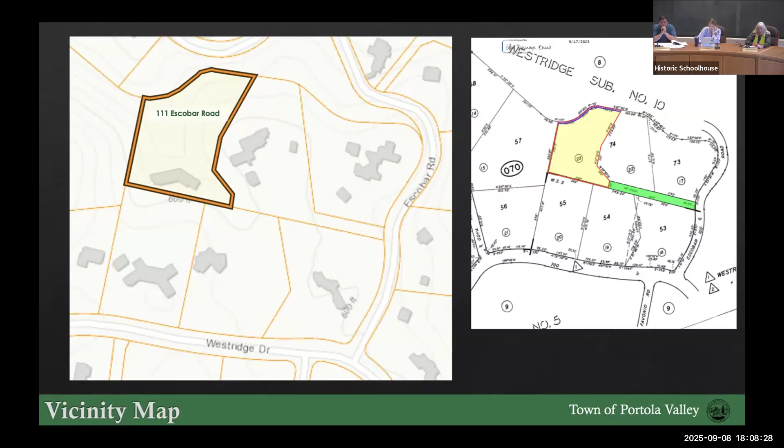The existing site includes a long access way via an easement at 111 Escobar that leads to a main residence with an attached carport. There are existing rear wood decks, a portion of which have been removed for safety reasons.

The existing residence main level is 3,273 square feet, of which 461 square feet are a junior accessory dwelling unit. There is an attached 581 square foot carport to the left of the main residence, and the residence also contains a lower level that is approximately 1,378 square feet.

There is a fenced vineyard, two fenced vineyard areas: one at the rear of the residence, and one at the left of the residence, which is the westerly portion of the site.

Existing fencing includes 6-foot wood wire fencing along the north perimeter, which has since been removed, and along the east and southern perimeters of the site. There's also 6-foot wood wire fencing around both of the vineyard areas.

The fencing at the westerly portion of the site, one of the vineyard areas, is proposed to be removed. It may have already been removed from over there, but that is proposed, will be proposed for removal.

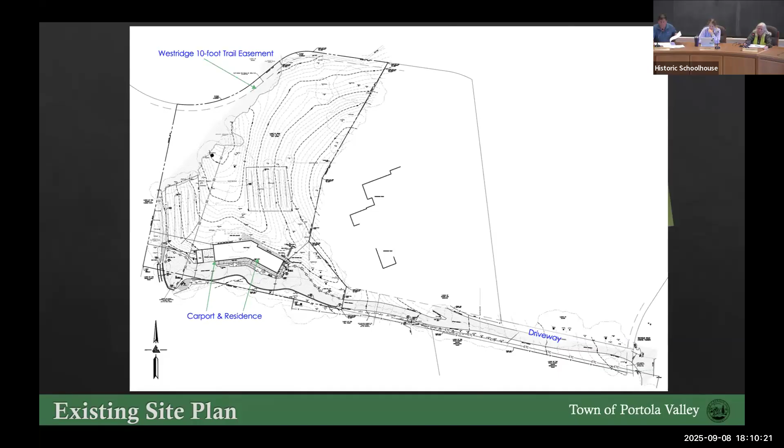The applicant proposes a 1,100 square foot addition with an interior remodel to the main residence and an exterior remodel, new decks, a new roof, a new stepped concrete driveway with portions that will be permeable geogrid pavers, fencing (one portion of which I'll discuss soon in a slide that follows), significant tree removals, and drainage.

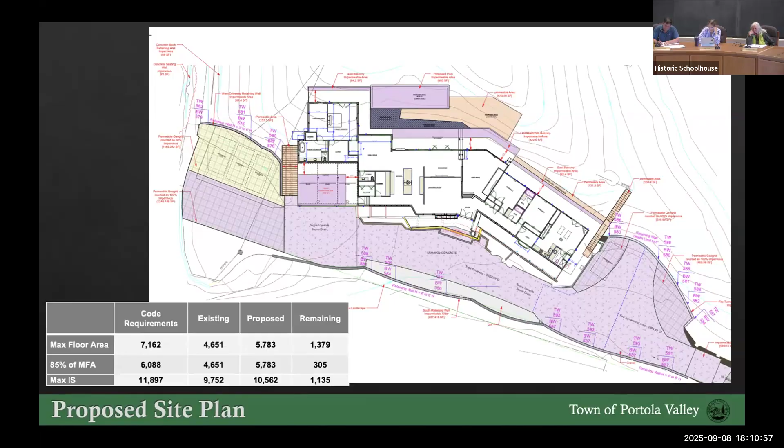The proposed site plan I have here shows the upper level and the lower level. This continues, as mentioned, the 1,132 square foot addition to the main level of the residence.

The proposed floor plan includes, in this peach color, a new primary bedroom and bathroom and an office, and then there's a 133 square foot approximate addition to the family room area.

There's also a 157 square foot front entry addition. On the lower level of the site, there's no work proposed for the interior of the residence. The work that is proposed includes the decking area and a pool.

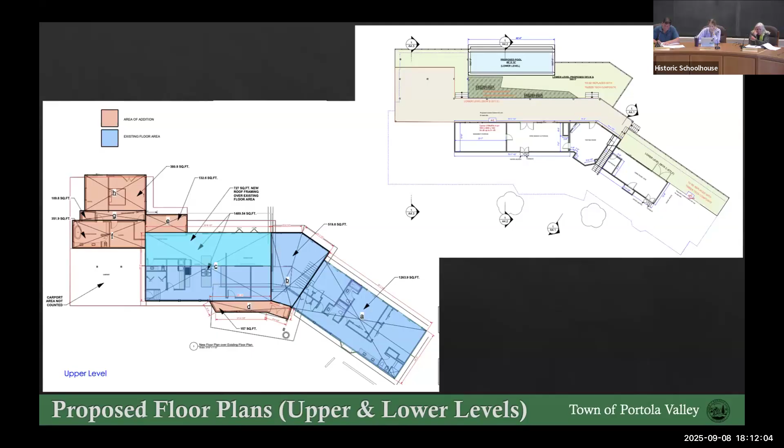The applicant is proposing a new stamped concrete driveway with an expansion area at the end of the entry drive access easement to allow for fire truck turnaround.

An existing retaining wall and seating area are located at the westerly area of the site. Construction of these two items is currently unpermitted, and structural review will occur as part of the building permit phase. At the site visit today, the on-site conditions were observed, and the ASCC may consider adding a condition of approval regarding the overall design at the building permit phase for this item.

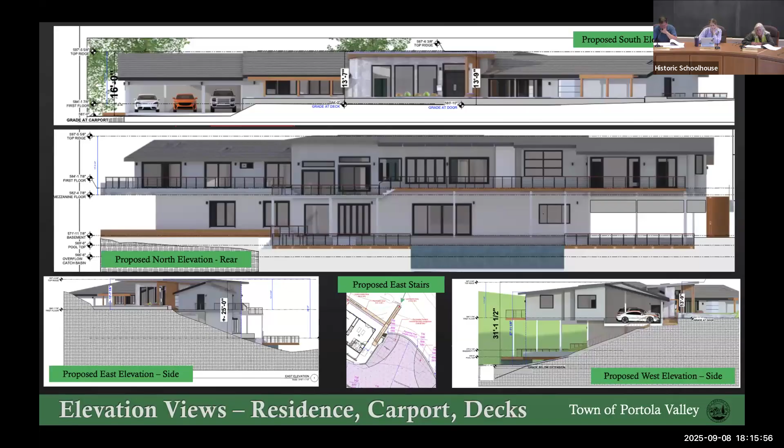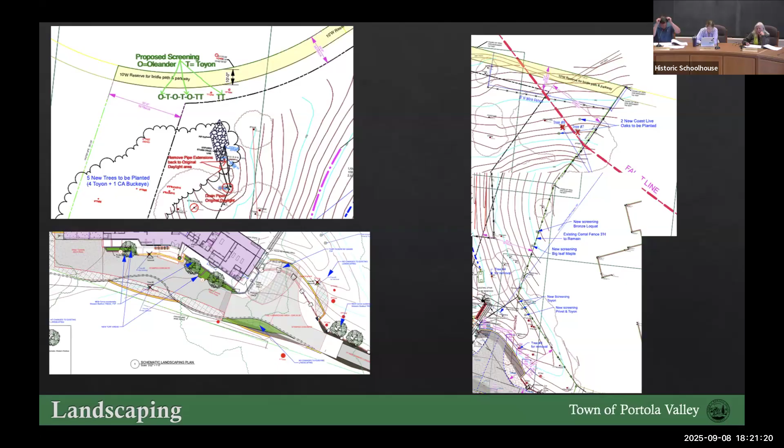Four significant trees and 1 non-significant tree are proposed for removal on the site. 2 additional significant trees located at the northeastern area of the site have been removed without a permit, mistakenly, by landscapers, and this has been added to the scope of work for the proposal.

The Conservation Committee visited the site and does not object to the proposed removals and plan of action as described in the landscaping plan presented in the previous slide. The Conservation Committee also recommends removal of a Monterey pine next to a stone pine tree and 2 cypress trees, and several privets between the cypress and Monterey pine. The area where these are located is on the left side of the driveway that I'm describing.

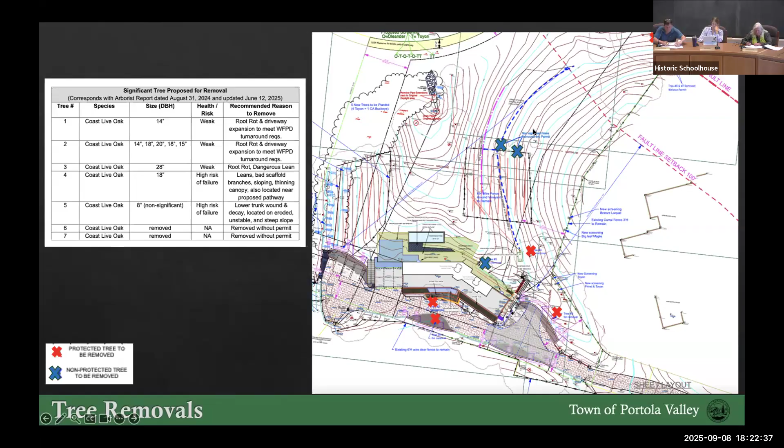Staff also requests that the ASCC provide specific box sizes for the replacement trees to be provided as a condition, where they had been removed mistakenly. Almost done.

There are 2 stairways: one leading down from the carport, and another leading down from the right side of the house. The proposal does utilize minimal lighting, minimal lumens, for safe movement throughout the site and for the structures. The ASCC may wish to provide input as well.

The applicant provided notice to several neighboring parcels on August 27, 2024, and the town provided noticing to neighbors within a 300-foot radius. As of August 29, 2025, no public comments were received to date. I forgot to mention at the beginning, the applicant did present the proposal to the Westridge Association and did receive a conditional approval based on the initial submittal that was provided.

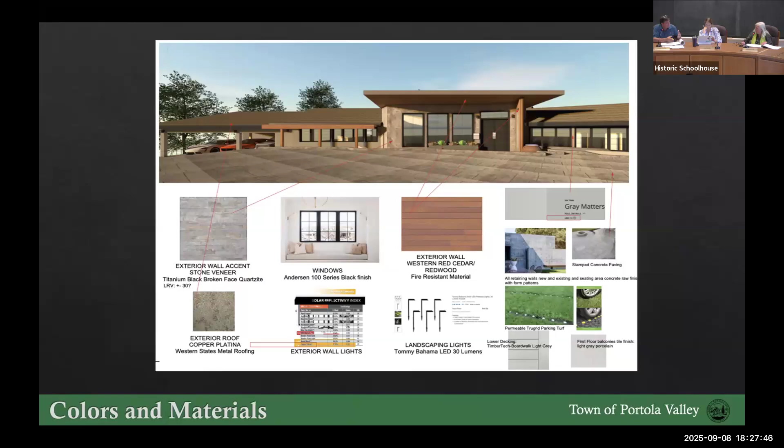Because we didn't look at the pool area at all, or below the house, I just saw that only 12 cubic yards were going to be excavated for a 40 by 12-foot pool. Maybe it's going to be built basically in a raised concrete retaining wall. I also do site work and landscaping, so it could be a combination based on what was provided.

Maybe there needs to be clarification, but I think combining this and this definitely makes sense. Stating that they didn't account for as much, it was more of a set, which made it different.

The cross section at A42 is the one I saw, and I went and referenced it, and I think I see now how they're building it with concrete retaining walls. It seemed nitpicky, I don't know if it helps, but one thing I could share with you.

Because of the slope, a lot of the pool is actually being built up, so there's not much excavation involved. The deep end, which would be 6 feet, is just sitting on the natural grade level, and the shallow end is on the higher end where the grade is about 3 or 4 feet. So there's not much excavation, which is what was explained to me.

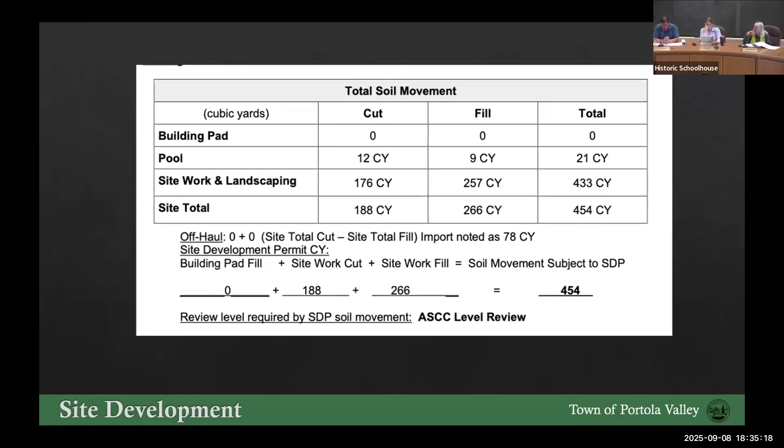I would like to know about the skylights. Will they have inside covers? I don't know what you mean by this. Will they be protected on the inside from light? I hadn't thought of it. You mean like shutters? The skylights on the roof, Jamie. Sorry, I said sky lamps, and I was thinking of the wall. I missed it. I think Dana's question goes to the radiating light, ambient light onto the trees.

Yes, on the roof plan here, if you're asking, I did ask the homeowner, and several of these lights are in areas that are not heavily used. There are areas that I can ask for clarification on, for whatever areas may use more light. All right, thank you.

No other questions? Do you have any statement that you want to make about your project? Yes, I do. Actually, I was wondering if you wanted to talk.

Particularly to our kind neighbors, Ed and Jackie, who came here and were also here this afternoon, what we want to do is disturb as little as possible of what they're viewing. So we talked a little bit about the retaining wall, and it's our intent to finish that retaining wall, which Lance pointed out is not very attractive because we had to stop work on it. But we're going to finish that over with a stucco that matches the retaining walls being built on the property for a fire turnaround and these other areas. So we're going to make everything match. And Lance pointed out that if we put stucco on the retaining walls in the west area, they will get mossy and grow over with greenery, and I think we agreed that's not a bad thing. So is that something that is okay?

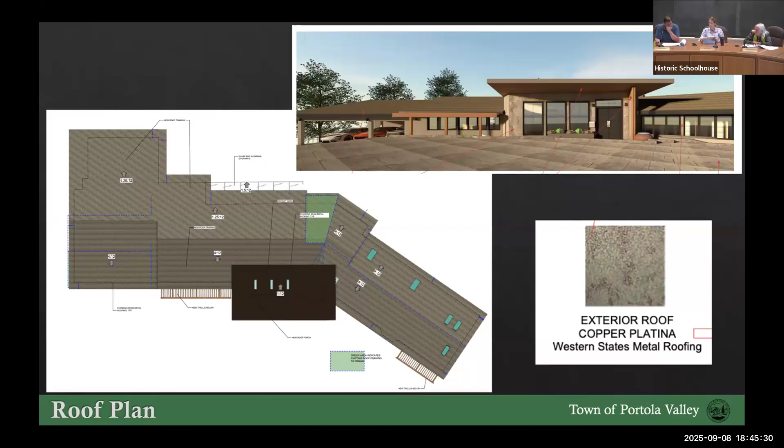Okay, and so that was the hope. But since we have actually removed the fence on the northwest side, and the fence on the northeast side, we're not sure if it helps or not, but it does conform. Because it's set back, it's like a fence orphan. It is a fence orphan.

We have to go through Westridge to come up with a proposal for fencing that will not be within the 20% of that area, but within our domestic fencing as allowed for fencing. We have to come up with a plan. It's not in violation of the city if it's not within 20.

But we need to work with Westridge to see how we can come up with a fencing plan that will not have to be... Okay, but isn't that seems to be far from your vineyard? It is. The idea was we wanted to keep the deer from coming in and eating the stuff on the property, but I don't know how that's going to sort out. I have to come up with a plan for that, so that they can do it.

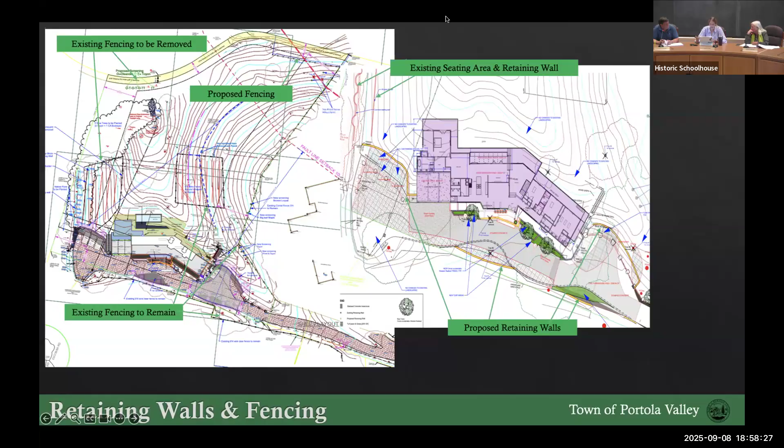It's also strange to me in the lighting plan that there doesn't appear to be any lighting there. We talked about the use, but it seems to not have enough information. If it's going to be where chairs and something, I don't quite understand why there's no lighting called out. It's kind of ripe for enclosure in the future in terms of how it's set up. I'm curious to get your guys' thoughts on that too.

If we're looking at it from the perspective of how well it was placed or massed out for the site, it's a little strange. I agree with Gina, and it's one of my notes - was that space specifically identified?

I know we talked about the area - there's not a north arrow on this page. East, where the new unpermitted retaining... North, west? Project West. There's not a north arrow on this sheet. Here's north, there's a house here, and there's the retaining wall here. Okay, so that's west.

I think we should have a condition of approval that a subcommittee takes a look at that once it's designed, because right now it's sort of loosely included, but there's no indication of whether there's going to be paving or what the finishes are. We don't have to talk about it too much, but as part of that, I know we talked about screening.

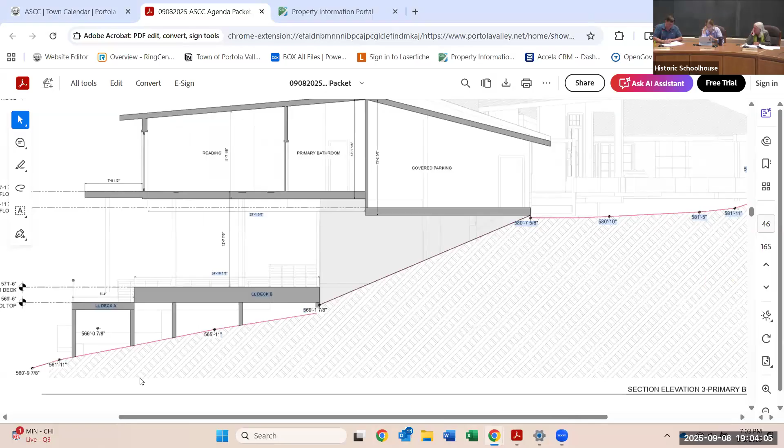Okay, I think I'm catching up, let me just go - I had started to kind of record. Well, we can jump back in too. Yeah, you guys can go ahead.

I like the project. I think I like the colors and materials. I like the design, I like the roof. I mean, so I think there are a lot of things for me that work.

Tree removals. Just because you guys didn't mention it, I think all the pines, the Italian stone pine, the Monterey pine, and the Italian cypress, I think conservation got the rest of it. And the privets, all privets need to be removed.

And I don't want to see you use the oleander. I think as the oleander die, I think they go. Like the town, it's part of the ethos of the town that we don't have oleander. And it's always rather shocking when you come around the corner and somebody's just surrounded their house with oleander. So I don't support that, the use of it.

The open space under the master bedroom, is that open? I would consider putting a contingency from the commission on that so it can never be enclosed. And so I would like to put something legal there so that can never be developed and enclosed without coming through the ASCC.

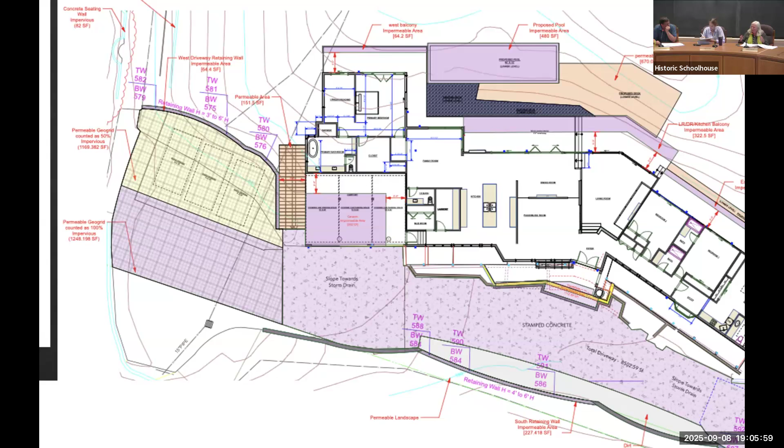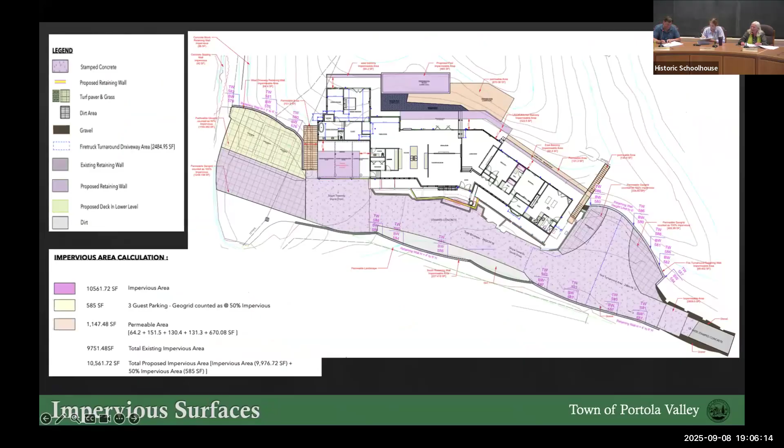Okay, and lighting. I don't know how we're even seeing plans that have lights at windows. We don't light at windows. The lighting ordinance is one door. I mean, it's not with the inspectors. You light one light at a door, no lights at windows. So, I mean, it's a dark town, and it's intentionally a dark town so that you can see the stars.

That's in our general plan. It's a pretty beautiful thing. So I would say remove anything that's at a window. You can have a light at a door. All those lights on the stairs going down, it's way too many lights. Maybe one every 4 or 5 steps, or develop something else, but not a string of lights - it looks like an airport.

Okay. All right, I don't want to overwhelm you here.

And the retaining wall for the fire truck. I understand the retaining walls and I don't know that Yerba Buena's going to cut it for covering them. The small one, okay. On the west side. Yeah, I know. Okay, both of those.

I mean, those are kind of where I was headed. And yes, I'm worried about the drainage, but I don't know how we're going to treat that. Well, I don't think it's fully finished yet. I don't think necessarily we need to. So we'll have to think about that in our motion, how we handle it. The civil guys will have to resolve that if it's not working.

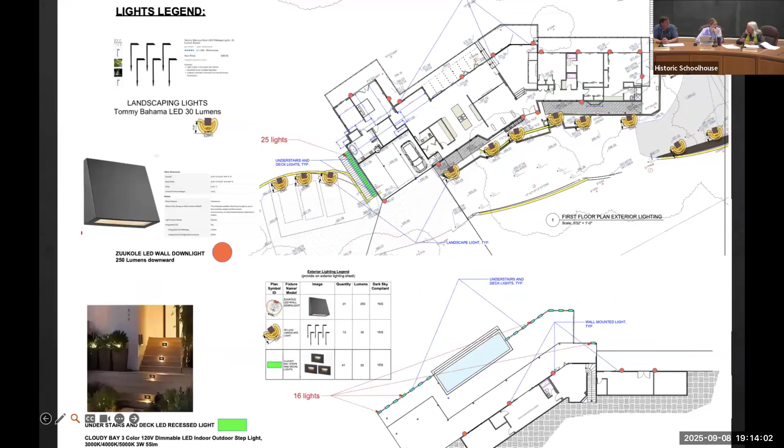And I know we're talking about having some lighting taken off at windows, but I do think, where you do have that area underneath your primary bedroom, it seems strange to not have lighting, like some can lights or something up in the ceiling. I mean, where maybe the crystal ball goes. I think that there could be lighting there, I guess is the point I'm making.

Right now, on the plan, there's no lighting there. It's a space captured under the footprint of the house that is so completely ignored that it screams it's not going to be ignored. Does that make sense?

Well, how do you want to handle that? Jamie, you have any suggestions?

Could we make it part— sorry to interrupt you, Jamie. I think we're gonna need to have some sort of subcommittee review, so we can just include the lighting plan as part of that subcommittee review. And we'll want to take a look that the ones outside of windows are removed, and then we can wrap this all up together, one review, to make it more streamlined for them.

So, the space under the new primary—verify the drain capacity, verify the exterior lighting, finish height, west wall finish materials. These are all things I've been jotting down on my notes here. That would be contingent.

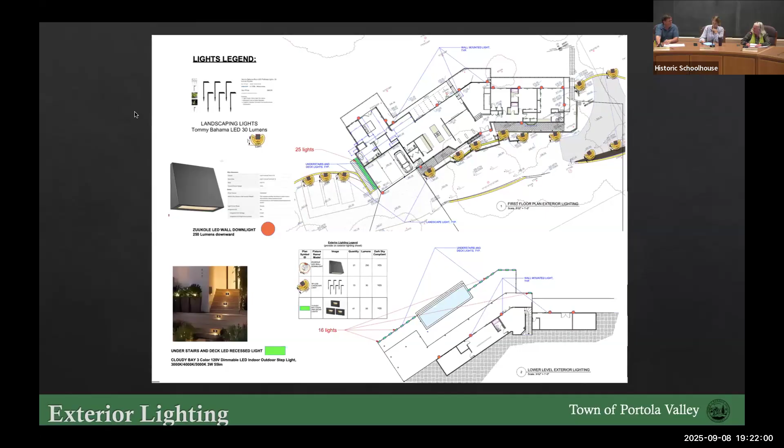We have to review the draft minutes from the July 28th, 2025 ASCC meeting. Did you guys look at them? I did. That's right, you weren't there.

Can you move to approve? Which one am I moving to approve? Move to approve the July meeting minutes. Yes, as presented. That's the two of us. Okay, approved. And call the question then. Aye. Aye. Okay, good.

So I think we have to - wait, we don't have a quorum because I think she wasn't here. I can't approve them. Actually, I think we can. Good point. I'm pretty sure it's the majority. Yes, I think we can approve.

But we should ask for public comment on them, either online or in here, on the July minutes, if you can remember. No hands raised online, we're ready to proceed. Approval vote, aye. Then we are approving the minutes, as presented. Done. What's next on the agenda?